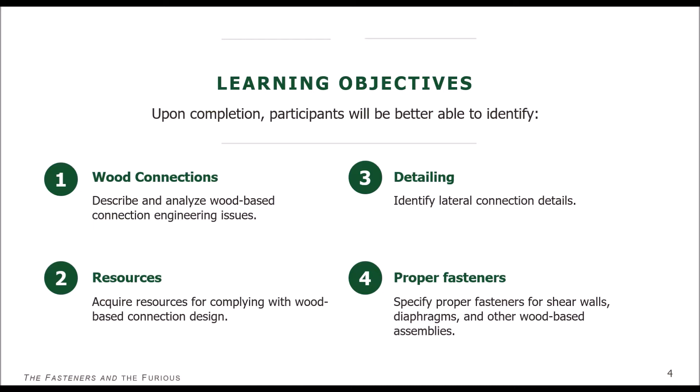As Marcy mentioned, we have some polls, and our first one is the easiest one because there's no wrong answer. Okay, one minute, there we go. So what is your profession? Architect, engineer, code official, fire service, builder, manufacturer, or other? Go ahead and let us know what you are.

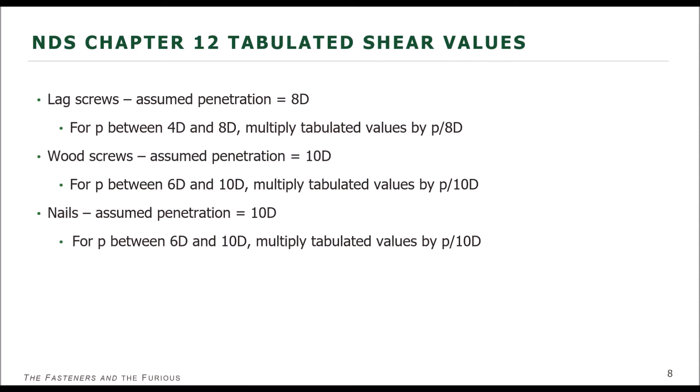A similar adjustment would be applied if your fastener has a smaller penetration than what is assumed in the tables. So again, these tables are for either 8D for lag screws or 10D for nails, and if your penetration is less than that, you'll need to apply that adjustment per the footnotes of the table.

Dowel length is another question that we get a lot when it comes to fastener calculation. There's actually two different ways of handling it, depending on which way the fastener is loaded.

For fasteners in withdrawal, for lag screws, minimum penetration is equal to 4 diameters. For lag screws, we do not include the length of the tapered tip in that 4 diameters of penetration. Wood screws and nails are a little bit different, we do include the length of the tapered tip.

However, for any fastener that has a deformed shank or threads, basically rings, something other than a smooth shank fastener, the actual length for withdrawal that you are going to be using is not the full fastener length, it is the length of the threads. So if you have a fastener that is only partially threaded, you would only use the length of the threads, and either the length of the tip or not, depending on what type of fastener it is in withdrawal.

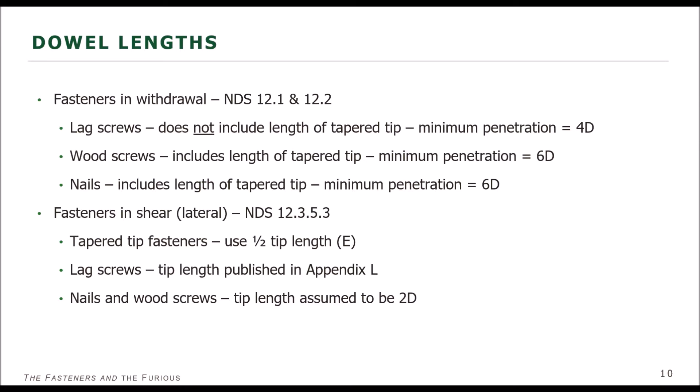Now, when we're designing wood, it's important to understand some of the basic concepts of how wood behaves. If you think of wood as a bundle of straws, that's a really good analogy. If you look at a piece of wood under a microscope, you'll see that the cells in the wood are round or elongated, and they're tube-like, which gives us very good strength parallel to the axis of the straws.

Perpendicular to the axis of the straws, we don't have very good strength. It's easy to crush in that direction. In the case of wood, it's especially easy to get in between those straws and split them. That's where wood is the weakest, is that tension perpendicular to grain.

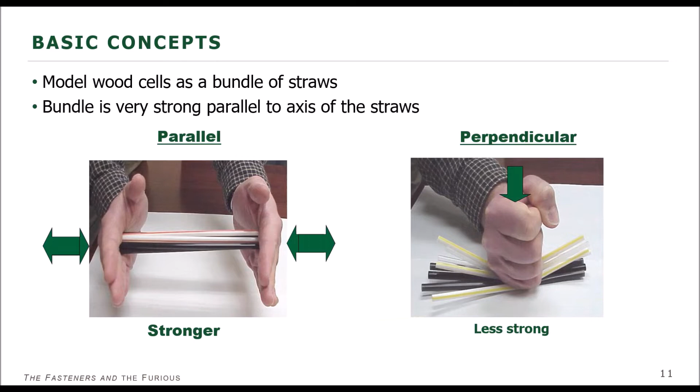So if we keep in mind that our bundle of straws is very strong parallel to the axis, but the straws themselves are prone to separation if you try to stick something between them, we use that philosophy when designing connections and understanding what causes splitting in wood. Splitting happens because the wood is very weak perpendicular to grain compared to the other directions.

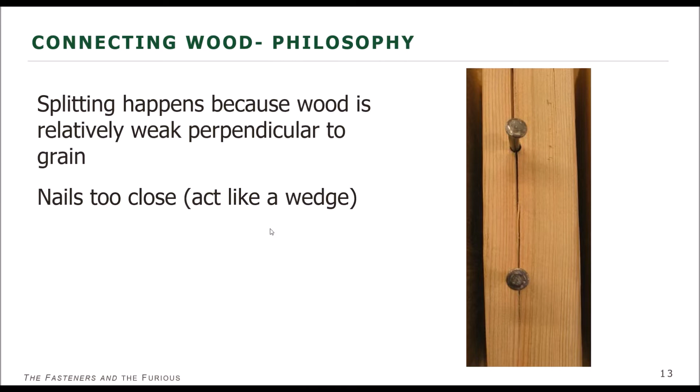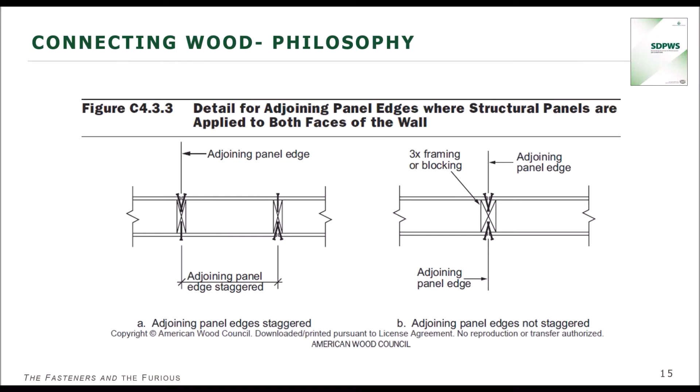So in SDPWS, this is a graphic of how nails can be driven at a slight angle, and in this illustration, it's slightly exaggerated for graphical purposes, but this shows that you can achieve the proper edge distance of the nail and still ensure that the nail is fully penetrating into the framing. So this is one way to help address that, and again, it's in the commentary of our special design provisions for wind and seismic.

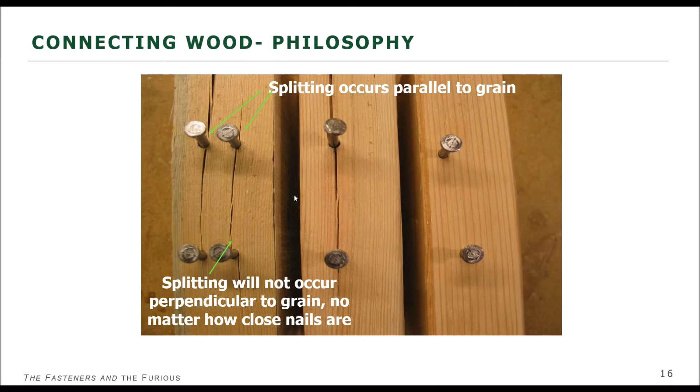So we get these splits in between our grain lines basically, and the nails wedge in, and they cause splitting parallel to grain. So even though these two nails here are much closer together than the top and bottom rows, we're not going to see splitting in between these two nails in these tightly spaced rows. So in this middle board, you'll see we have fewer nails, but we still have splitting due to that linear arrangement of the nails. So our third board here, we see the staggered nails where the center line of the nails is slightly offset. And again, that minimizes the splitting because we're not having the nails behave as a wedge.

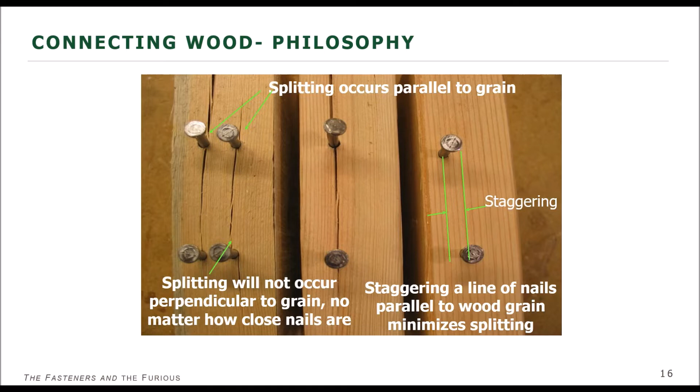Excellent. It looks like people are paying attention. Fantastic. All right, I've got just about 30 seconds and 75%. So let's go ahead and close this and find out what we've got. So 88% have voted all of the above and just a little bit on the others. So I'm hoping that it's all of the above. It is all of the above. Congratulations to everyone that chose correctly.

So again, I should have clarified in the question. It was the tabulated shear capacity for the fasteners. Yes, so we were missing a word there. But yes, for lag screws, we assume that the penetration is 8D, and then for nails and for wood screws, we assume for the tabulated values only, again, remember, that it's 10D. So, all right. Now let's go back to a little bit more of the wood connection philosophy.

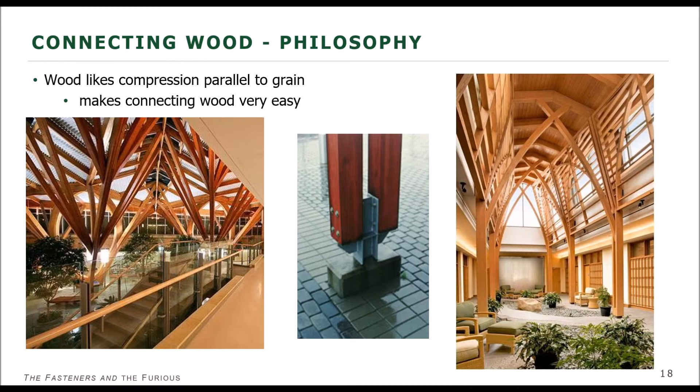So we talked about how wood is very weak in the perpendicular to grain direction. Wood is very good at resisting compression parallel to the grain, which makes sense because if you think about how a tree grows, it is resisting the most load parallel to the grain. So if we think of how the tree behaves and we exploit the strongest mode of the wood, then we're able to capitalize on this idea, and we can produce economical designs that, as you can see in these photographs here, can still be very architecturally pleasing.

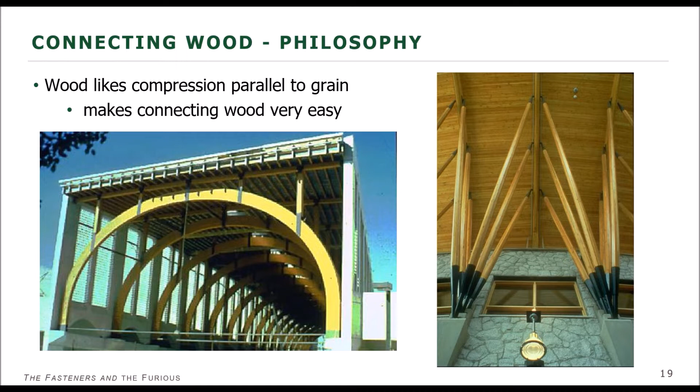So when you're designing with wood, keep in mind that compression parallel to grain is much easier to resist in wood than, for example, tension perpendicular to grain. So we keep that in mind when we're designing it, and we can build off of that. Another thing with mechanical fastenings is choosing the size of the fastener. So you need to keep in mind the scale of the fastener relative to the wood member size.

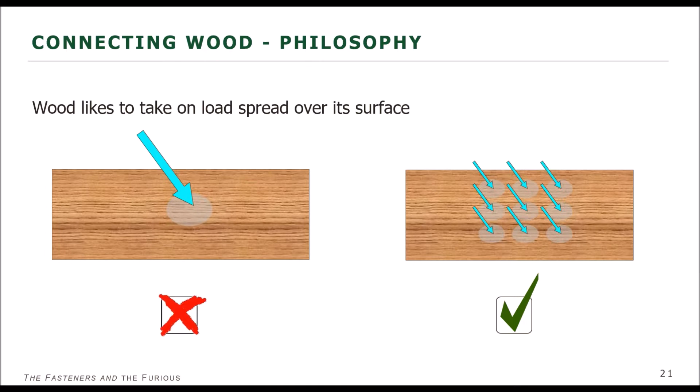So in general, it's better to use more smaller fasteners than it would be to, for example, use a large single fastener. Where you're resisting load with a single fastener, sometimes we can see bearing or crushing failures underneath it, or above, whichever side of the fastener where it's bearing. So when we're able to reduce that load per fastener and spread it out, we reduce things like crushing at the fastening. We also are able to build in a degree of redundancy with multiple fastenings, which as engineers, we're all big fans of that, right?

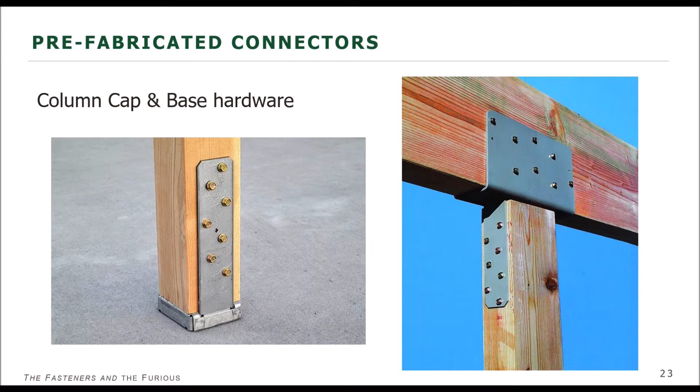There's a whole host of prefabricated connectors out there. Everybody's got their favorite manufacturer, so I won't get into one versus the other, but regardless of the manufacturer you're choosing, their products will typically have this in common: they use multiple smaller fasteners in their connections.

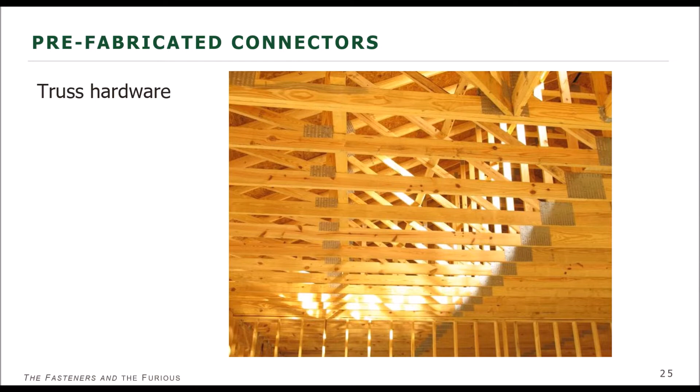Timber rivets are something that's in the NDS, and they have been used for decades, both in the US and Canada. They're not as popular in the United States for whatever reason, but they definitely have some benefits, and we do like to make folks aware of them. So the term timber rivet, despite its name, it's not actually a rivet made of timber like I thought it was when I first started.

Now, if you look into the research used in developing the equations for these timber rivets, it's limited to glue laminated timber, but further than that, it was actually done with Douglas fir, larch, and southern pine glue lams. So if you're using a species other than that, you may want to be careful, because the research has only been done on those two species of glue lam.

The NDS does have some requirements for both the material and the geometry of timber rivets. For the rivets themselves, there are requirements in terms of the grade of steel, its ultimate stress, and they do need to be hot dipped galvanized. The side plates have a minimum requirement of ASTM A36 steel, and if they're in a wet service environment, they are also required to be hot dipped galvanized.

If you're not in wet service, you may still want to consider using a galvanized plate or some other type of coated plate, because when you have dissimilar metals in contact, they can cause preferential corrosion in one of the metals. So for this example, if we had a galvanized rivet and a plain steel side plate, because of the different types of metals, there could be some corrosion that occurs at that fastener. You do want to take care to ensure that you're preventing that. We'll talk about that a little more when we discuss treated wood as well.

But there's a lot of applications, and here's just some applications you can see of timber rivets. And the capacities on these can be measured in the tens of kips, and that's a very high load, a very high capacity for a wood connection.

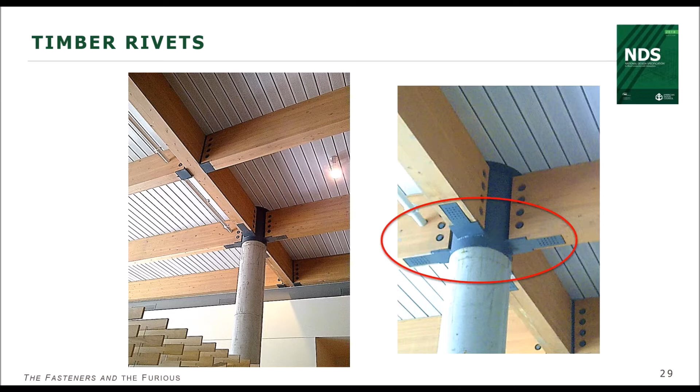Here's an example that Michelle actually found at an architectural firm office in Dallas, Texas, where we did see some timber rivets in use in the wild in the US. So they are out there, and if you're interested in using them, it's certainly something that can give you some more options in terms of your connections.

Technical Report 12 provides an alternative set of yield equations for fasteners in shear. It gives you a few options that aren't available if you're using the NDS equations. Most notably, the NDS requires that members using the yield equations be in direct contact with each other. The equations in TR12 can accommodate a gap between those two members. So if you have a gap or other material between two wood members that has no bearing capacity, you could use these equations.

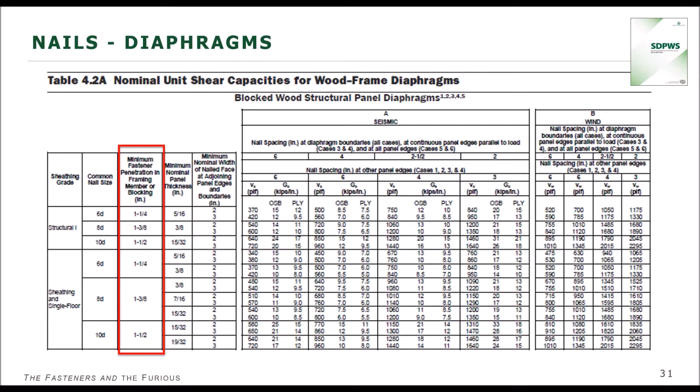Similarly, for the shear wall tables, we again are limited this time to common or galvanized box nails. So again, these are nails in accordance with ASTM F1667, but only common or galvanized box. You're not going to see any sinker nails used in any of these tables, and we do not have tabulated values for roof sheathing ring shank nails in either diaphragms or shear walls. So if you're using these tables, you're going to need to use the common nail, or if you're in a shear wall, you're also permitted the galvanized box nail.

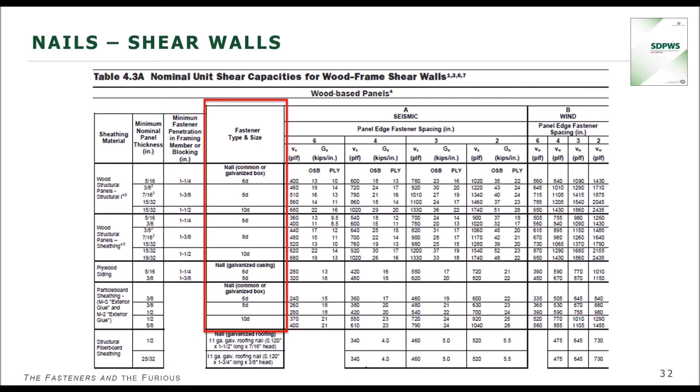So if you're using a fastener that's not in the NDS, we've kind of bounced back and forth and talked about some that are and some that aren't. But if you are using a fastener not in the NDS, there are provisions in the IBC to allow that, under the alternative means and methods section of the IBC. There are either manufacturer specifications or evaluated third-party reports that can be provided to the building official, who would have the discretion to approve or disapprove.

So we talked about the yield mode equations somewhat. The yield mode equations are used for calculating shear capacity of any dowel-shaped fastener. I mentioned there's a set in the NDS, there's a set in TR12. They are different, but they will give you identical results, so you could use either set as long as the fastener is a dowel-shaped fastener. You will need to know the fastener dimensions, and you will need to know the yield strength of the material, which is something that's typically going to come from the product manufacturer.

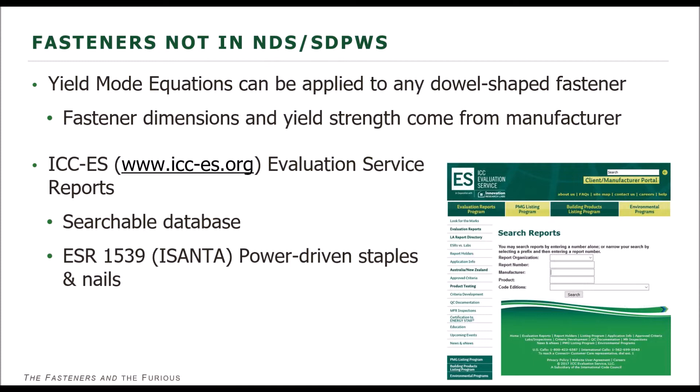In terms of third-party reports, ICC-ES has a great searchable database. One ESR that I commonly direct people to is ESR 1539. That is the evaluation service report for power-driven staples and nails, and it's by ISANTA, the International Staple, Nail and Tool Association. They also have additional resources on their website based around ESR 1539, so if you're looking for further information, there's some really user-friendly bulletins on their website, and you can see the link on the slide.

So here's an example of the nails covered in ESR 1539. You'll see they discuss not only the shank style, they also provide smooth, ring, and screw shank, various diameters as well as the sizes.

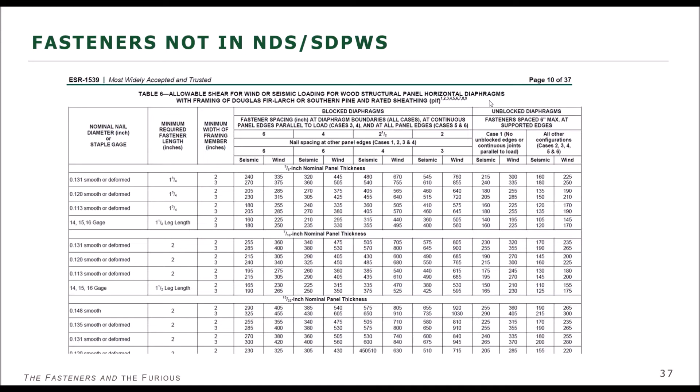And this is the table in the report that you would use for your diaphragm capacities. There's another one for shear walls as well. This table in ESR 1539 would be analogous to Table 4.2A from the Special Design Provisions for Wind and Seismic that we took a look at earlier. It gives you your fastener spacings, your seismic capacity, your wind capacity, and they provide it for both blocked and unblocked diaphragms. So it's pretty similar in layout to what you'd be familiar with from SDPWS, and it shouldn't be too foreign.

Joist hangers are something I briefly touched on. These are, again, proprietary, so it's not just joist hangers, any sort of pre-engineered connector. They're proprietary, so they're not going to be covered by the NDS. Again, you'll need to get the capacity either from the manufacturer's literature or from a third-party testing report. And as with any proprietary product, the installation requirements are going to be per the manufacturer's specs.

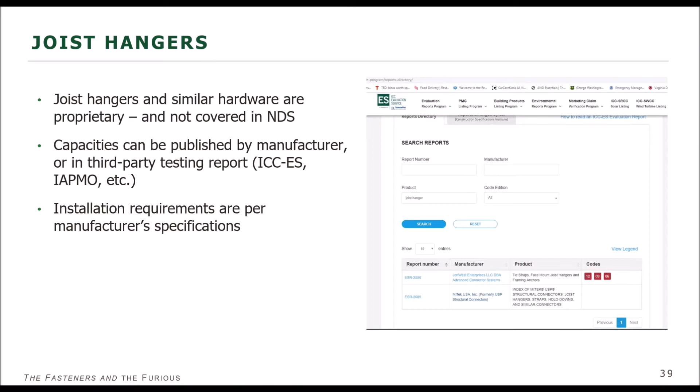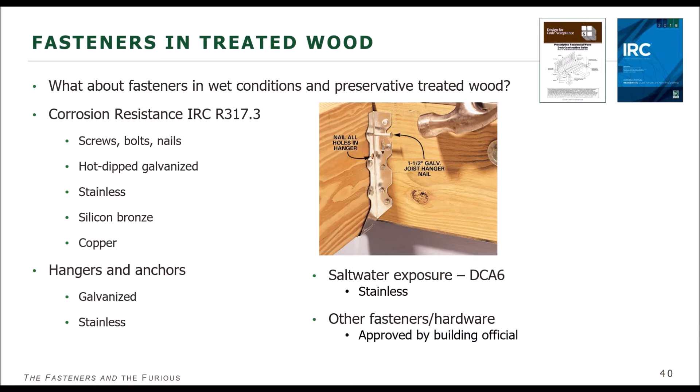In terms of hangers and anchors, limited to galvanized and stainless, unless you get into saltwater exposure, in which case it would be limited to stainless. Again, this is another one of those places where you want to make sure you don't have dissimilar metals in contact that are going to lead to preferential corrosion of one metal. So if you're specifying galvanized hangers, it's probably best to just specify galvanized hardware as well. If you're specifying stainless hangers, just go the extra mile, save the aggravation, and specify all stainless fasteners.

With fire retardant treatment, the fire retardant treatment chemicals are again a proprietary product, and with proprietary products we need to talk to the manufacturer. So for fire retardant treated wood, we need to get the adjustment values, if necessary, from the pressure treater that applied the fire retardant treatment chemicals.

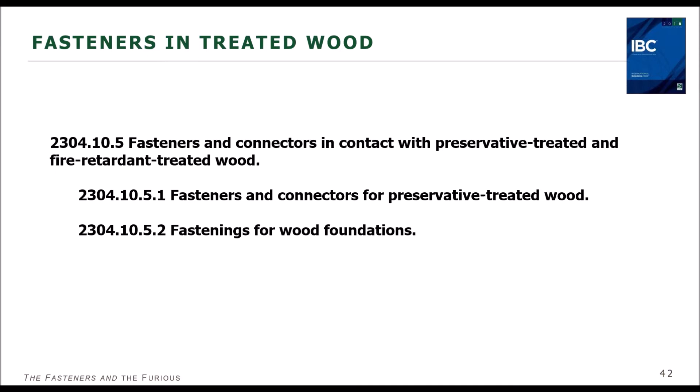There's some additional language in the IBC to govern fasteners and connectors in contact with preservative treated or fire retardant treated woods. I'm not going to go through the paragraphs in these sections. I just wanted to provide everybody with the appropriate code references so that if you did want to go in and see what was available, that would be available to you all. So these are the appropriate code references.

All right, we've got our third poll here, which Marcy's going to launch in just a second. But before she launches it, I just want to point out that for option A, we're talking about the design values from the preservative company. For option B, the design values are coming from the fire retardant treatment company.

Perfect. Oh, I think you might need to adjust your mic, you sound a little far away there. Thank you, it was on top of my head.

All right, so which of the following is true about fasteners and treated wood? You need to obtain fire retardant treated lumber adjusted design values from the preservative company; obtain fire retardant treated lumber adjusted design values from the fire retardant treatment company; fasteners shall have corrosion resistant coating; all of the above; or answers B and C.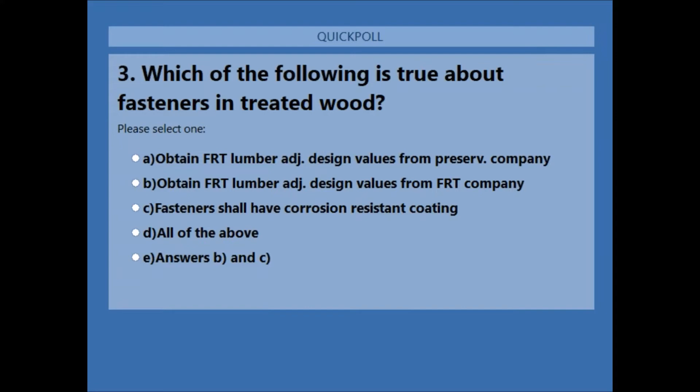Okay, so let's see, I've got 75 and 45 seconds, so let's go.

60% answered A, B, and C or B and C. 27% said all of the above, and a little bit for the others. Which is it, Miss Lori? All right, this one was tricky, yeah. So this one was definitely tricky.

So it's B and C, and it was one of those questions—it was an SAT question. Sorry guys, you had to pay attention to the wording. So if you are using fire retardant treated lumber, the adjustment values need to come from the fire retardant treatment company, not the company that is making or applying the preservatives. So that is one of those slight nuances. But congratulations for those of you that got it correctly.

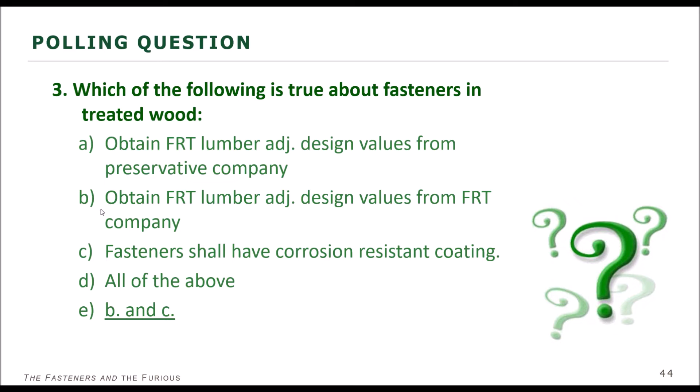Okay, yes, I believe you're seeing my screen. And as Lori mentioned, we'll be talking about nails. And we get a lot of questions about what's coming up in the 2018 NDS, and it has a lot to do with nails. Now, when we go to the job site, we see tons and tons of nails.

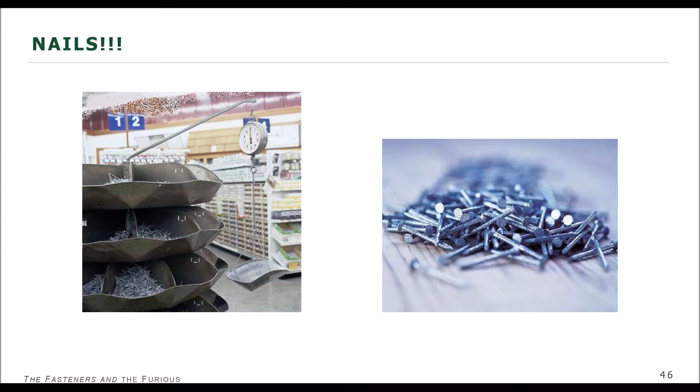We know there are different types of nails out there and from various manufacturers. But unfortunately, the NDS can't cover all of those nails, so we need to make some assumptions with developing the standard. And the standard is based on nails that are made per ASTM F1667, which is shown here.

Now, we also assume a full round head, which is shown here, and that is because they are the typically referenced nail size in codes and standards of prescriptive tables. And so we're assuming that there is a round head.

Now, some of these other heads that are shown here may see use on their website, on the job site, because of the pneumatic nail guns, and some of them may even be covered in the ASTM standard. But as I mentioned, we need to narrow our focus on certain types of fasteners.

And for those that don't meet the requirement of the round head, Lori had mentioned this previously, there's ISANTA, which is the International Staple and Nail Tool Association, that has an ESR report that can be very helpful with coming up with some capacities for shear walls or diaphragms. They have tables that look very similar, with capacities for these types of fasteners.

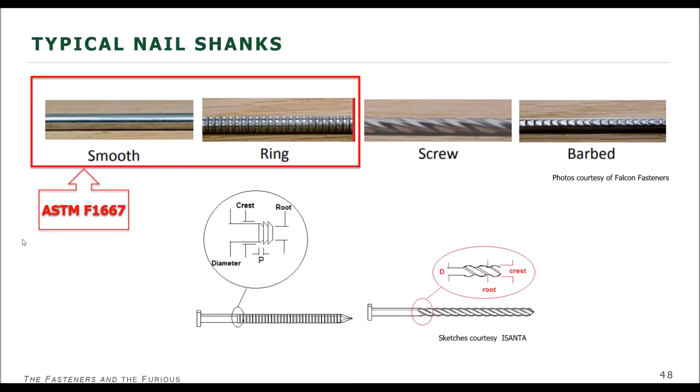The other two nails are not covered in the NDS, but you may be able to find capacities for those in an ESR report. Key to that is, when using those types of nails, submitting that documentation to the code official, and the code official will have the final say on whether or not they accept those ESR reports.

So now that we know we have some assumptions for the nails, we need to make sure we specify in our drawings the proper information to define the type of fastener that you're using or assuming to use in your design.

Because just calling something 10-penny common is not going to provide the exact information that's required, because there's so many different nails out there. In fact, for 10-penny common nails, there could be 20 different 10-penny common nails. So to avoid any problems, we want to specify the penny weight, type, diameter, the head and shank diameter, as well as the length of the nails.

And in the NDS, you can get that information from our table L4 that's in the appendix, and I believe Lori had mentioned that before. We also have, in the wind and seismic provisions, table A1, which is, I believe, the same table, although the edition is off from the 2015 to 2018, but they're very similar tables.

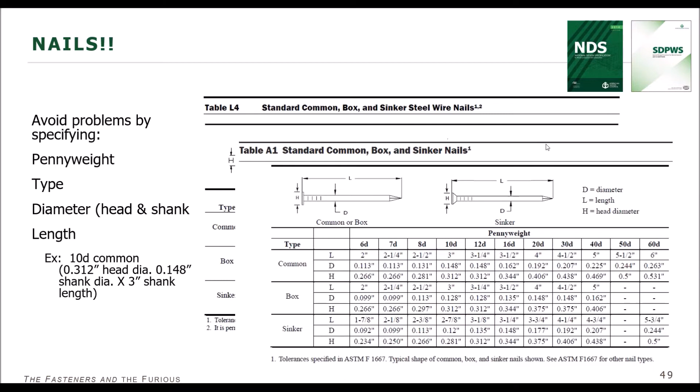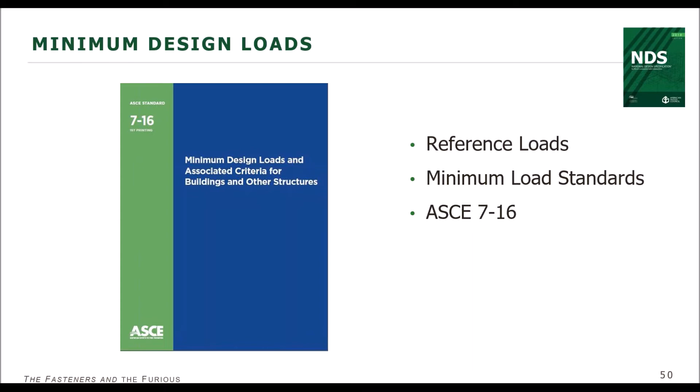Now, one of the reasons why we have some pretty big changes related to nails has to do with the demand on our structures and the changes that have occurred in ASCE 7-16. The NDS references ASCE 7-16, and it has to do with the wind loads.

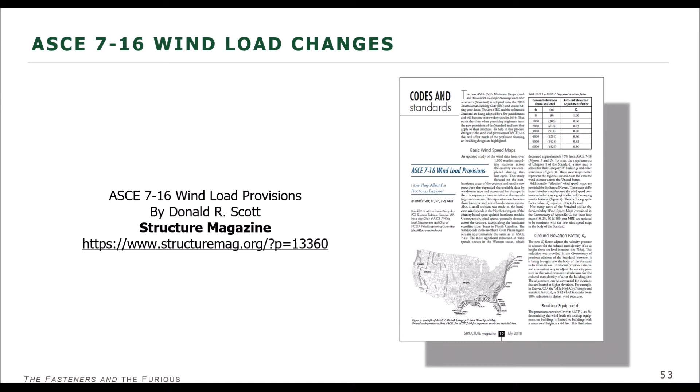There's a really good article by Donald Scott, and you can download it for free. It was published in Structure Magazine. He actually did a webinar for NCSEA that gets down into more detail related to the changes for wind load provisions. But one of the areas where we're seeing a change also is when it comes to components and cladding design loads.

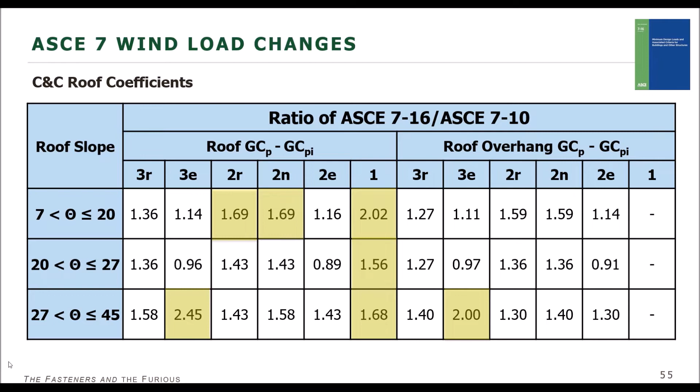But will that really increase the demand on your structure if we have higher coefficients? Well, when we look at the equations for determining our maximum pressure, we see this Q sub Z, which is the velocity pressure at a certain height Z, and it has the wind speed right here. Then that is plugged into our equation here, where we convert it to ASD. And then we also include the component and cladding coefficients.

So if your wind speed stays the same and you're doing this components and cladding design, then your pressure will increase. But as I mentioned previously, in some areas of the country the wind speeds will decrease, and that would possibly offset that increase that we see in the components and cladding equation.

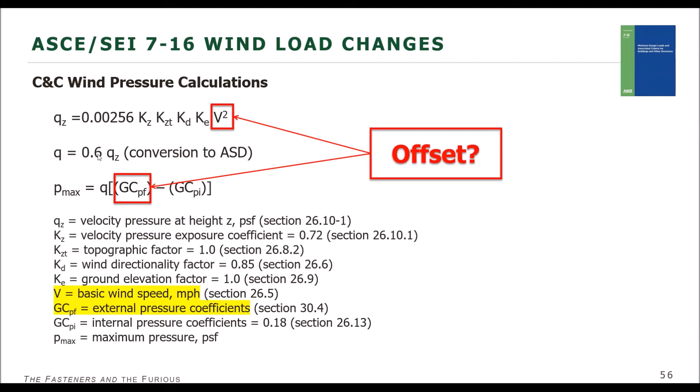So now we'll get into chapter 12, where we have some changes related to how we're going to provide proper detailing and a solution to these wind uplift loads on the roof, where there are certain areas of the country where we're going to see an increase in the demand on our structure. And that's where the roof sheathing ring shank nail comes into play, which is shown here.

So we have now a new table, table L6, which shows the roof sheathing ring shank nail, and has all the information related to it. Note that the nomenclature for a roof sheathing ring shank nail is not a penny weight, it's called a dash number, and I'll show you in the next few slides. So when you call it out on your drawings, you'll know that.

But I mentioned earlier about some clarification of the language, some introduction of language such as smooth nails versus deformed nails. So we've gone up and clarified the language in the section on nails. In 12.1.6, we added the roof sheathing ring shank nails.

We had specified that we need to meet the requirements of ASTM F1667, but we also now include supplementary requirements. So engineered construction shall meet the supplementary requirements of ASTM F1667 related to S1 nail bending yield strength. We also have changed language for this, clarifying that the nails and spikes need to meet the requirements of the supplementary. We are also requiring that the head diameters of the nails need to be included also in the specifications.

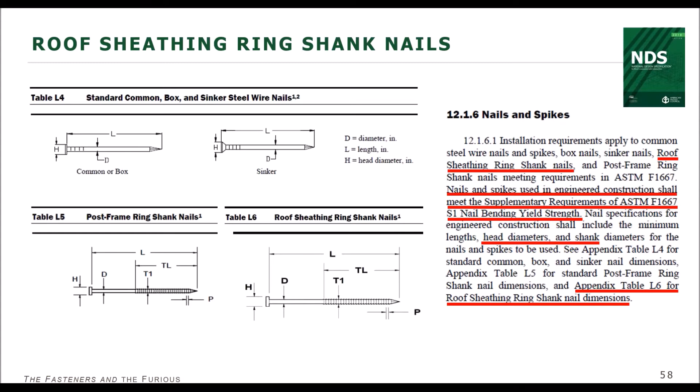Now we go to the section on the actual nails and the smooth shank nails or spikes. We've made a delineation now that we have bright and galvanized carbon steel nails included. Also, we have a new section for stainless steel nails, because the capacities between those two types of nails is very different.

Just to bring that idea home, we have on the horizontal axis specific gravity for the wood. So southern pine would be 0.55, Douglas fir would be around 0.49 or 0.5, and hem fir is somewhere in between. On the vertical axis, this is pounds per inch of penetration.

The red is the carbon steel, bright or galvanized nail, whereas the stainless steel is in blue. So you can see, depending on the actual specific gravity of the wood, we can have as much as a 40% difference in capacities of the nail. This was all for withdrawal, but it's all for a smooth shank, 8-penny common nail.

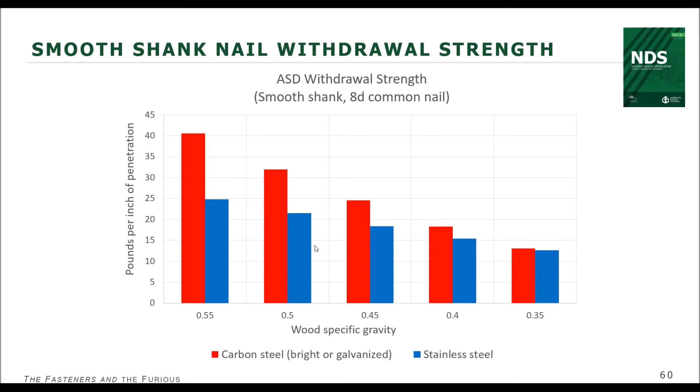Okay, so we're going to continue on through. We just went through the section on smooth shank nails, and now we're going through deformed shank nails. Again, this is all having to do with withdrawal. And we have now the roof sheathing ring shank nail that's included in our standards.

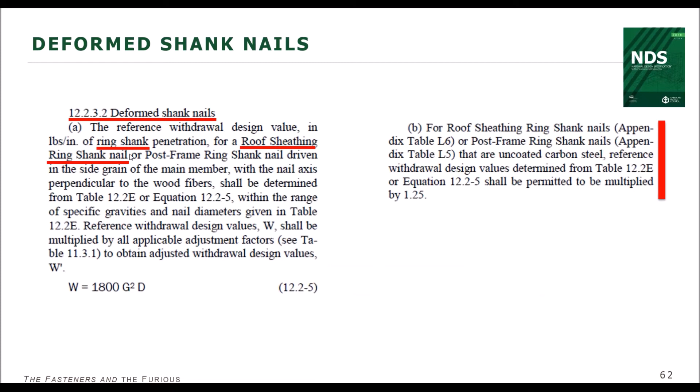We've included it in our standards, so we've updated our capacities to include the roof sheathing ring shank nail for withdrawals. You can see there relative to the post frame ring shank nails. I don't think that's used as often.

Now, the other thing is that the roof sheathing ring shank nail has been in the industry for quite some time. We're just providing it now in the NDS to help designers out, to provide ways of determining capacities for them other than going to an ER report. So now it's permissible for these different capacities that are provided.

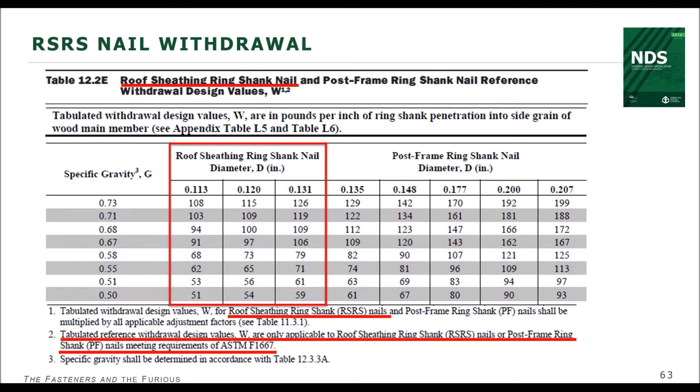Also, we have now an additional failure mode for these types of nails. Previously we looked at the withdrawal of the nails, which was the withdrawing of the nail from the main member. Now, however, we have fastener head pull-through. Data used to set industry recommendations for wood structural panels, combined with historical data from tests of lumber and plywood, was used to analyze the development of these new fastener head pull-through provisions.

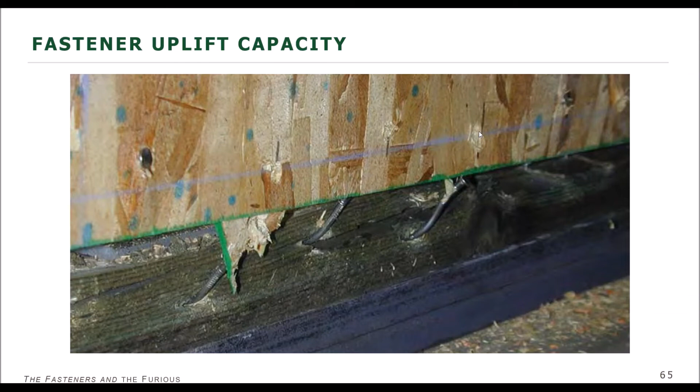So analyzing these fasteners, now we have to look at the two equations, the two modes of failure: the withdrawal from the main member, and then the localized stress in this area and pulling through.

The roof sheathing ring shank nail is 3 inches long. We have Douglas fir larch in the 2x6 member. The wood structural panel is 7/16 inch thick, and this happens to be an OSB rather than a plywood. The nail that we're using is a roof sheathing ring shank nail, dash number 5. It's not a pennyweight - the nomenclature is dash number.

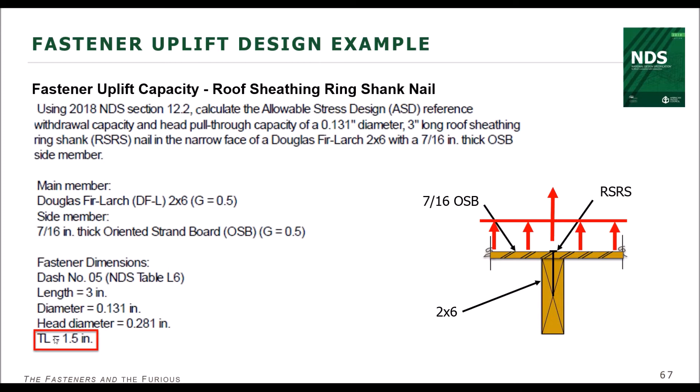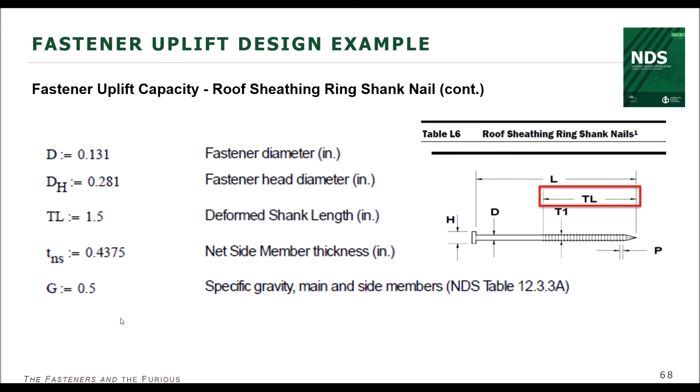So the key to this is when we look at our withdrawal, we're not using the whole length that's embedded into the main member. We're using the thread length, which Lori touched upon previously. So we go to this table, and this shows you the thread length here. Also, this gives you all the information from the tables and from our side member, et cetera. That's the given equation.

So first we're going to check withdrawal. We go to our equations and we see 1800 times the specific gravity squared and then d diameter. So this gives you the equation. You can also go to the table just to get the capacity. And here it is - we get the total length, or thread length, and multiply times 59 gives us 88 pounds. Notice this colon-equal - this is not anything, it's just something MathCAD does, just for your information. It's not a new term.

Now let's look at fastener head pull through. Our side member is 0.438 thick, and then we do 2.5 times the diameter of the head, and that will determine which equation to use. So plugging that into the equation, here's the result - we see that we have to use equation 6a. Now that we have that, we plug everything into that equation and come up with a capacity of 67 pounds.

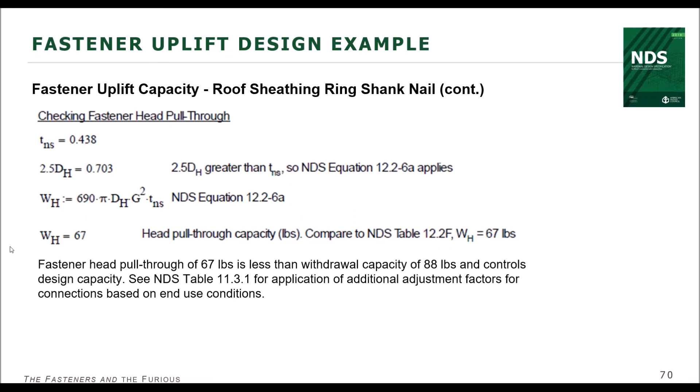So of the two, the governing one is the nail head pull through. It would be interesting to see what would happen if we thickened up our wood structural panel. Perhaps that would increase our capacity of head pull through, but I'm not sure if it would make it greater than the withdrawal of the nail. Now, good news is we actually do have tables with head pull through and withdrawal of the nails, and you can compare the two to find out which one's governing.

This is a handy table that actually does the comparing for you. It says minimum capacity of withdrawal or fastener head pull through is tabulated. Perhaps this might be incorporated in the NDS in the future, but right now it's in the wood frame construction manual, which can be downloaded from our website for free. It does not include the commentary, but it goes through and checks both equations and puts the governing capacity here, and does it for a common 8-penny, common 10-penny box, and the roof sheathing ring shank nail.

Okay, so we have one more poll. Wood is strong perpendicular to grain and less strong parallel to grain. True or false?

This is a little tricky because it has to do with Lori's part of the presentation. All right, we're getting there. I've got about 10 more seconds.

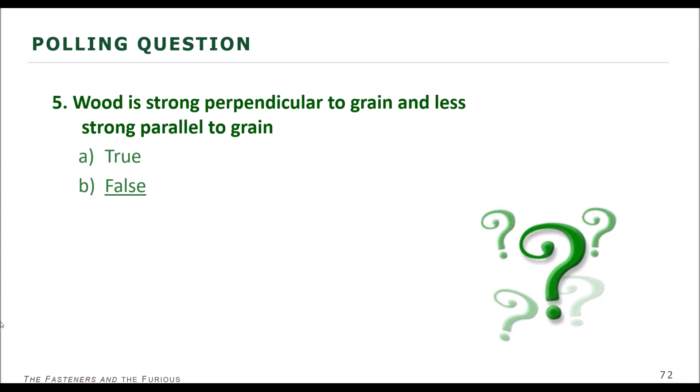Okay, the next part of this has to do with detailing considerations. We have talked about this in some of our presentations in the past, but every time we go out into the industry and give presentations and talk to engineers throughout the nation, this is something that is sometimes missed, even by very experienced wood engineers. They aren't aware of this section. So that's why we continue to talk about this.

What it states, and this is in section 11.1.2, stresses in members at connections, is that local stresses in connections using multiple fasteners shall be checked in accordance with principles of mechanics. So if you have a group of fasteners, you need to use principles of mechanics.

Now, how do you check those local stresses? Is there any method to check it? Well, one method to check it is in Appendix E. It's not mandatory that you use Appendix E, but it's really good. It spells out the different modes of failure for engineers to determine and calculate this. So this is Appendix E, and I'll go over what we're talking about.

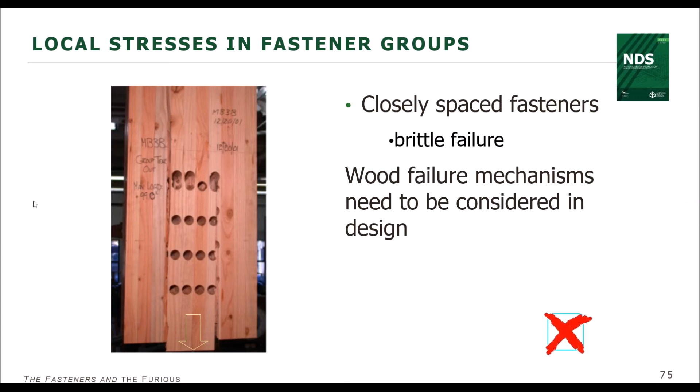But when you think about it, if you're grabbing onto something and you just grab onto a small portion of it, that's not going to provide you as much capacity as if you spread out your attachment over the surface of the member. It makes sense. You're going to grab more of that. So here, when we have properly spaced fasteners, it increases the ductility of this connection and you get higher capacity. It did fail, but it has less connections and higher capacity.

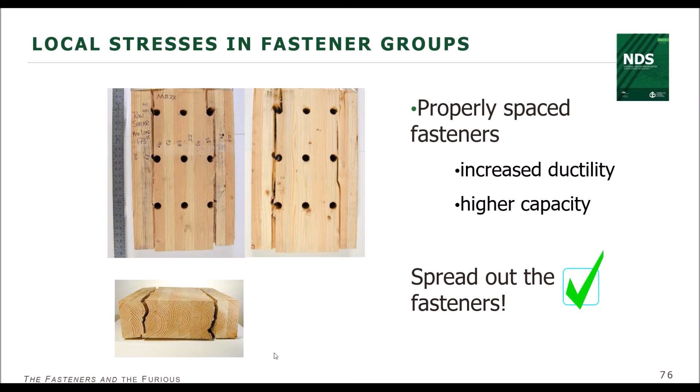And so here we have the equations that are in Appendix E. We have a net tension failure across this section of the wood member, and then row tear out, all along the individual rows here and here. And then the third mode of failure, which can be the governing capacity for a connection of group fasteners, is this whole group here, depending on how closely spaced these bolts are.

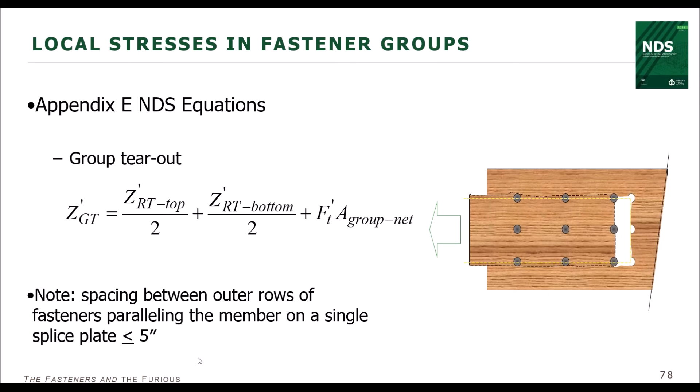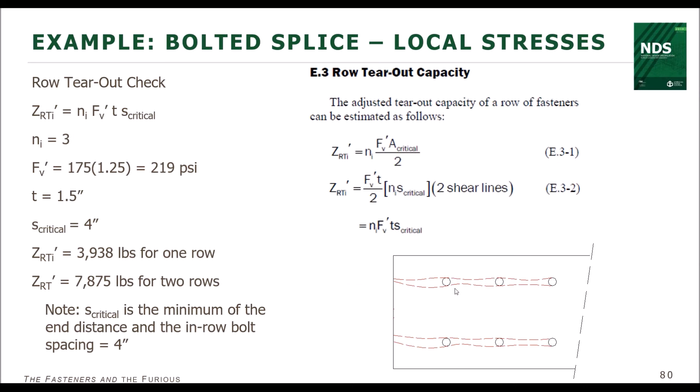And then for the group tear-out capacity, we have this equation, Z group tear-out. And then similar, we look at the whole net section around this area, the area group net all around here, to determine our capacity.

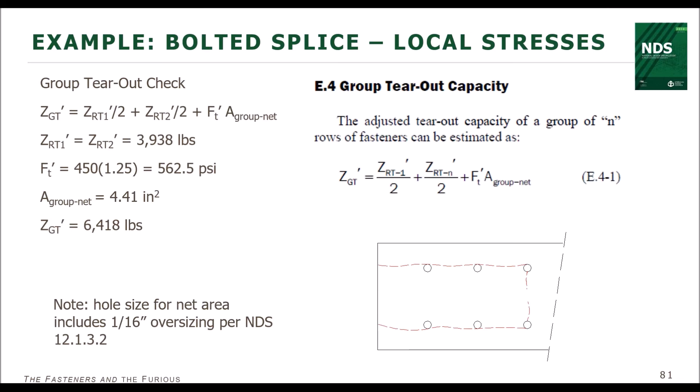This is the net section tear-out, through the depth of the wood framing member. Then we have the row tear-out shown here. Now that's the same for all the bolts, based on the spacing in that row. What we have here is the row spacing, the distance between—let me go back to this. So the row is here, 4 inches apart.

So that's something to look at—a method for the engineer to design for localized stresses and checking localized stresses.

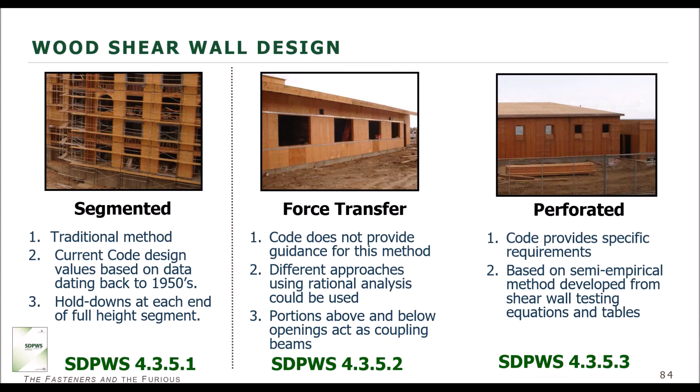So given that, we have three different types of shear walls. The one that we're going to be talking about has to do with a force transfer around openings.

Now there's some advantages and efficiency in the design of a force transfer around openings. One of those being that the aspect ratio is based on the pier height at the opening rather than the full height of the wall. So for a segmented shear wall, the pier height is the full height of the wall.

And for a perforated shear wall, I believe it's the full height as well. But for force transfer around openings, we can use just the pier height because we're treating this as an entire wall, and we're providing additional detailing across the opening to make sure our load gets transferred across it. So instead of it being 8 feet over 2, it's now only, say, 2 feet over 2. So we get a break there.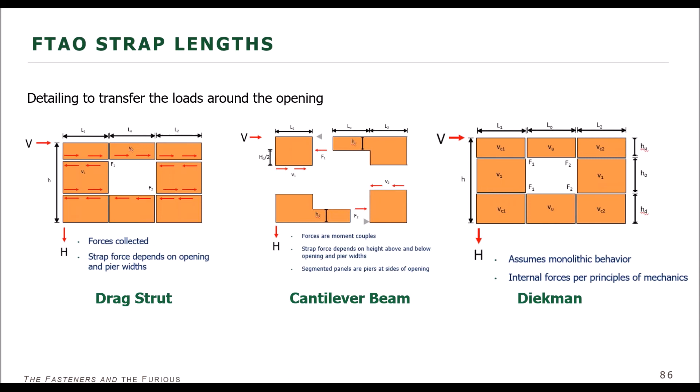When we look at the overall requirements for force transfer around openings, we have this note, and that's where the issue we're talking about comes into play. What it states is collectors for shear transfer shall be provided through the full length of the force transfer shear wall. So this is the limitation. So what does that mean? Collectors for shear transfer - does it have to be along the whole length of the shear wall?

Well, some have interpreted it as this: this is your force transfer wall, this is a force transfer around opening wall, and that this strap has to be along the full length of the wall. Well, the intent of that note is for the collector at the top of the wall that transfers shear forces between the diaphragm and the shear wall. It doesn't have to do with the strap around the openings.

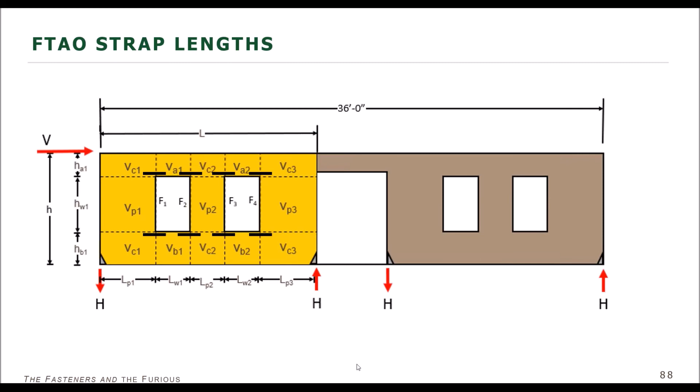And so we remove that, and we can have our straps right around the openings, not the full length. So typically you would have top plates that provide that collector element or strapping to have that continuous continuity of transferring that load from the diaphragm to the shear wall.

So if you're interested to get further information about the force transfer around opening research, APA did some research back in - the study began in 2009 with APA, University of British Columbia, and then the USDA Forest Products Lab. They did research, and this publication came out in 2011.

That's available on the APA website. All you do is go to apawood.org. You have to have a username and password to create an account, but once you do that, you have access to all of their publications, or most of their publications.

We also have a recorded webinar on our website that goes into more detail on the force transfer around opening design. We had APA partner with us on this webinar, and you can watch it. It's on our e-courses, and it's available for free to watch. You can earn continuing education credit if you pass the tests.

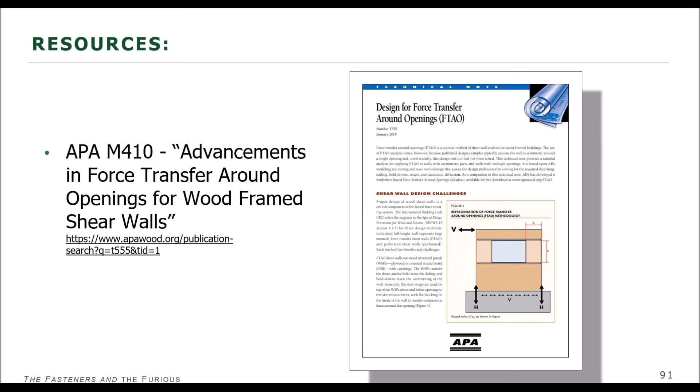And then there's a publication by APA that provides an actual design example of the force transfer around opening method that they determined based on the testing that was provided. And then there's a spreadsheet calculator that they provided for free that you can download. But I want to emphasize, this is one method that can be used. It's not prescribed in the code, but definitely a method that can be used, a rational analysis.

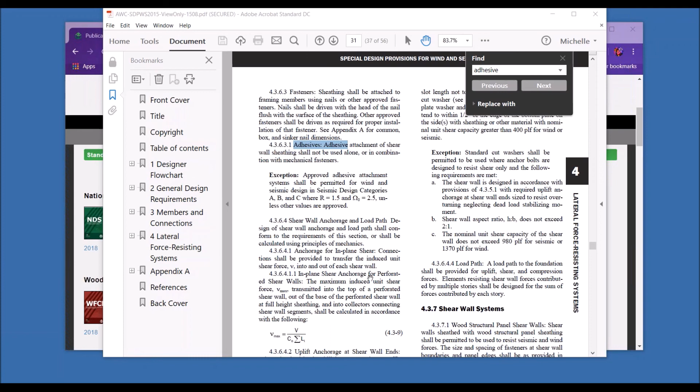Can you see my screen? Yes. So this is the section that talks about adhesives, just for those interested. It does allow use in low seismic areas where ductility isn't as critical a challenge for shear walls.

Right, in low seismic areas. Yeah, I did forget about the exception. Good pull, Michelle—that's what we do, we help each other out.

Okay, do you have any? Let's see. All right, here's a question: can you give an example of what we would use fire retardant treated lumber for?

Oh, that's actually a good one. You want to take that? Sure. There are a couple off the top of my head—the code allows the use of wood in exterior walls, provided the exterior wall is framed with fire retardant treated wood, and that has to do with type 3 construction and heavy timber construction.

Type 3 construction is becoming more prevalent throughout our nation, since that's the type of construction where you see 5, sometimes 6 stories of mid-rise construction. Type 3 gives you larger buildings than, say, type 5 construction. But it states the exterior walls need to be of non-combustible construction—however, fire retardant treated wood is allowed to be used at the exterior wall.

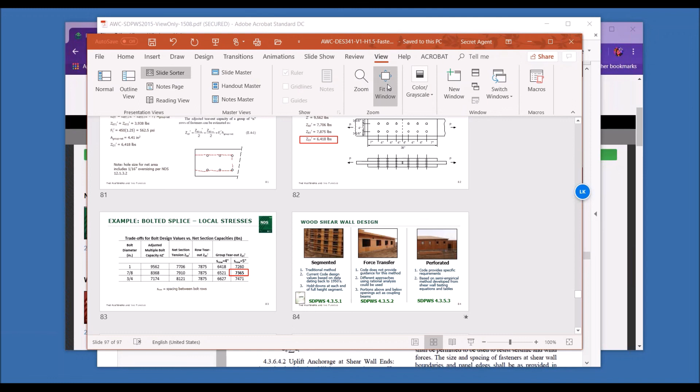If you're in a situation where you have many tall, skinny, high aspect ratio piers, Michelle alluded to the fact that FTAO can be a little more forgiving when using shorter pier heights on those walls. So there's not one method that's better, the methods are functional, they work for your building. I wouldn't say there's one method that is better or worse than others. I think it's dependent upon your structural geometry, and the size and location of your openings can have a very big impact on that.

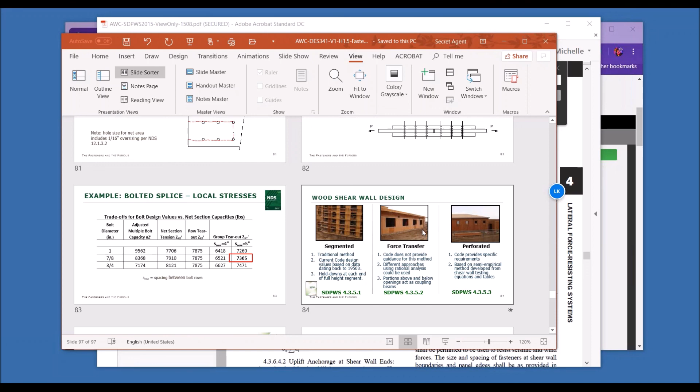Right, and you see some efficiencies in your anchorage. For example, for this segmented wall, just looking at this wall in the middle, you would have possibly a hold down at each full height wall if this was a segmented shear wall. Whereas for overturning of a force transfer around openings wall, you have a hold down at each end of the FTAO shear wall. So let me see, like here, you'd have an anchor here and here.

And then for the perforated shear wall, your required capacities of that hold down are going to be higher. There's a higher demand because they want to make sure this is anchored correctly and that the failure goes up into the shear wall rather than at the anchorage at the bottom.

Okay, any other questions that we want to cover here? It looks like they've slowed down. Yeah, we had a lot of really good questions today.

Do you want to cover the timber rivet connection question someone mentioned? Oh yeah, yeah, so timber rivets, what was the question on those? I thought I saw it, why does it provide higher capacity?

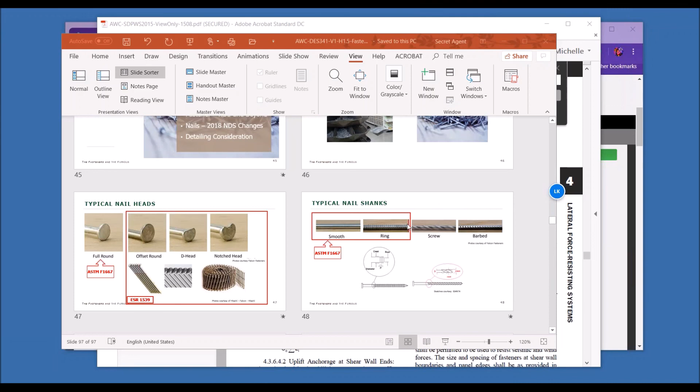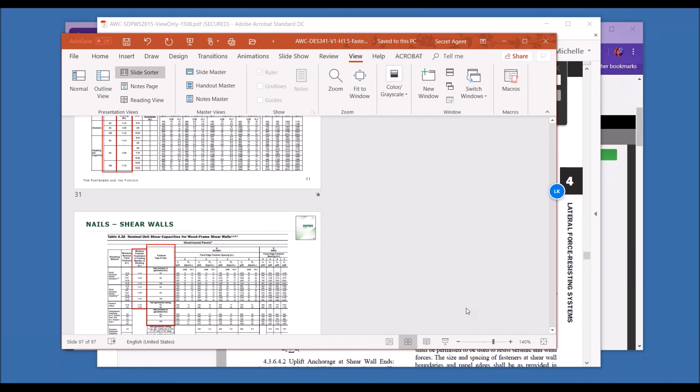So many fasteners, right. So yeah, there were some questions that dealt with the spacing of the rivets. We had some people asking about splitting, and that's a very astute question. The holes on the rivet plates are going to be spaced to allow the fasteners to minimize splitting. So if you go into chapter 12 in the NDS, there are specified distances for end and edge distances, as well as spacing of fasteners within rows and between rows, and that's in chapter 12 of the NDS.

So the holes in the plate would be positioned in a way that would minimize that concern. Also, remember when we talked about the scale of the fastener compared to the scale of what it's being attached to? In this case, we're using these timber rivets typically on very large glulams, and the rivets themselves are not that large from a relative standpoint. So the risk of splitting would be minimized because we're putting a small fastener into a very big member.

Right, and think of it as if you were looking at those straws, and what if you had a needle into those straws, and a bunch of different needles in that straw? That's not going to really decrease the integrity of that wood member. Whereas if you had a big, huge bolt in that member, you're going to interrupt those fibers or the grain of the wood also. Can you tell me a little bit about these connections and what's unique about that?

Yeah, they actually are pretty unique. They're the ultimate square peg round hole, well, I guess kind of an oval peg. So what happens is as you hammer the timber rivet into the main wood member, it's going to deform the steel plate around it, and that actually creates a lock almost. It gives you a bit of a headlock at the top that will deform the plate around the rivet, so you get a very, very tight connection there.

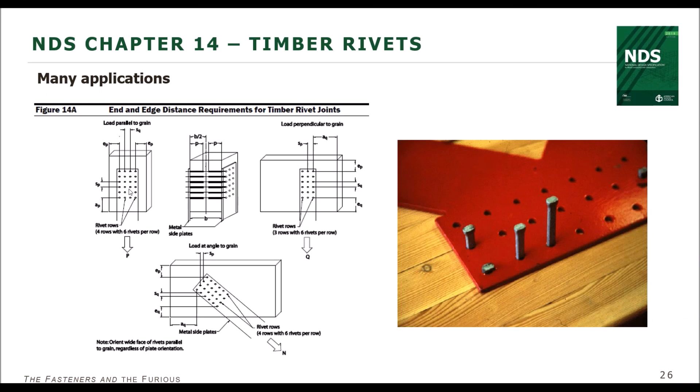Yeah, and as we said, these are pretty small rivets, so when you start combining multiple rows of them, you can have very large capacities on these connections. And what's interesting is, in the NDS there are specific patterns for these rivets, but when they drive these rivets into the member, they actually drive them in on the perimeter of the connection. So if this is a connection, they're driven in here, and it kind of compresses everything, and they go in and in, circular in, so they're compressing that wood a little bit as they're driven in.